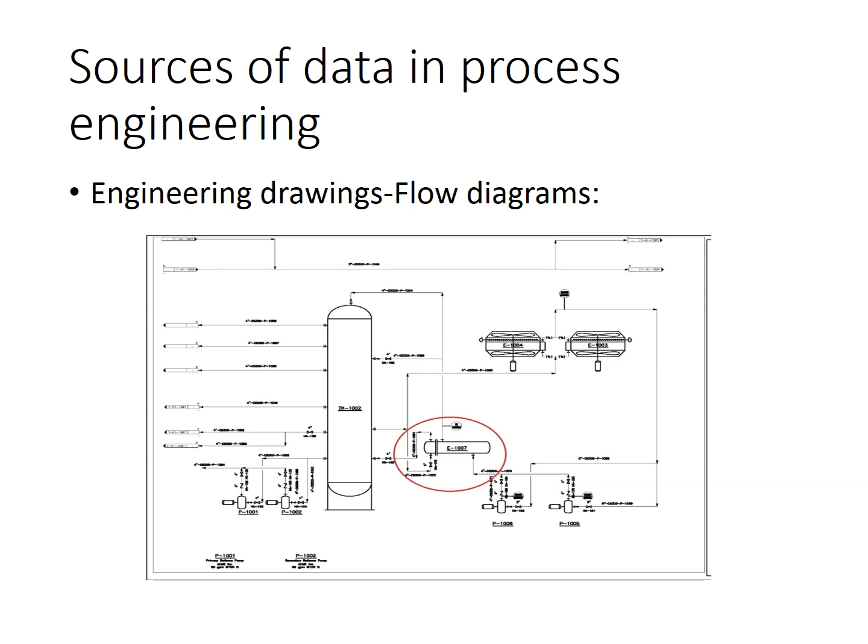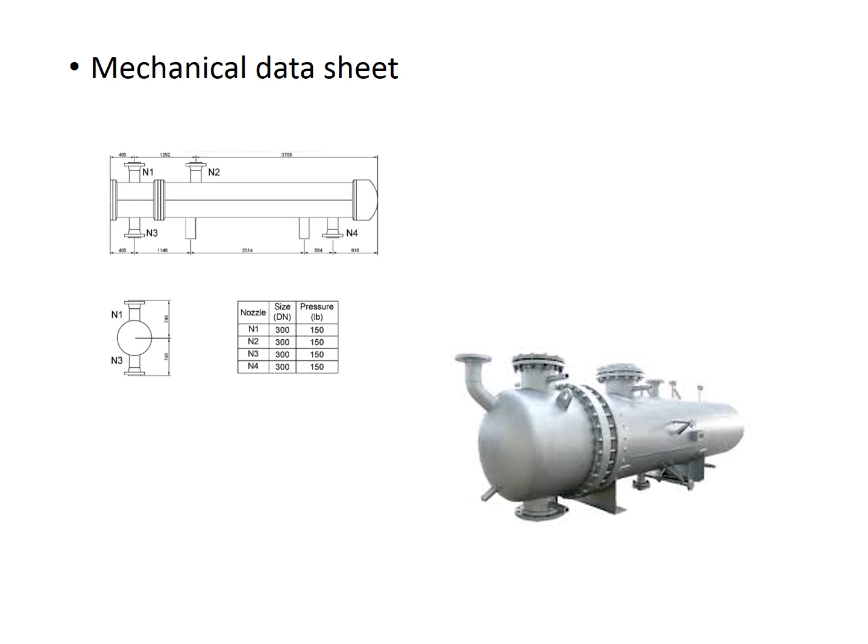The one I'm sharing here is another engineering drawing called Mechanical Data Sheet. It's full of data, but still only a human can read the data from this. And also we have engineering specifications and standards that we have to deal with. Again, they are human readable. It is not possible for a machine to understand, except if the machine can do NLP, or natural language processing.

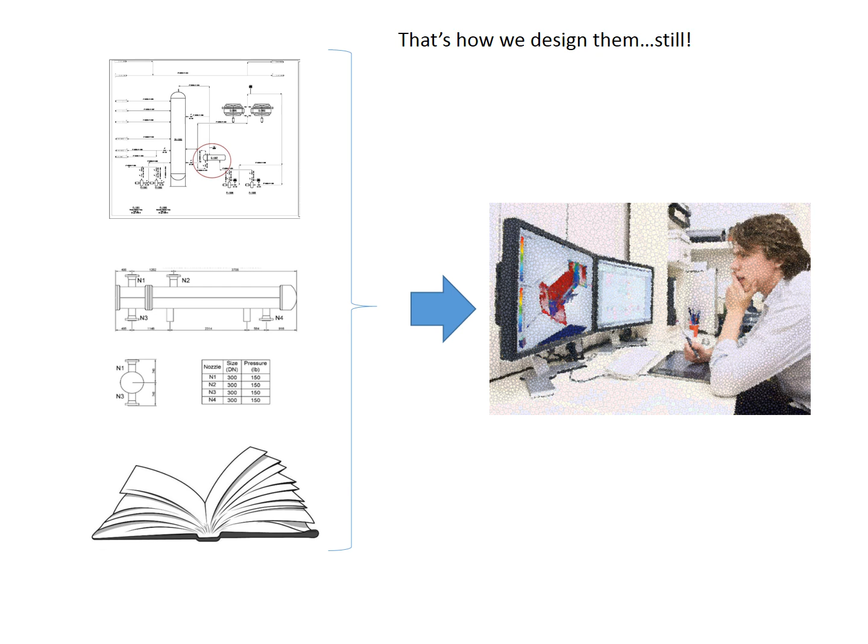So how do we design process plants, and how do we decide during operation or shutdown maintenance? What we do is gather all the data, as you can see on the left side. We gather all these engineering drawings, specifications, standards, and we send them to a designer, an engineer, a person in the operation field to design or make decisions. So that's a dream. That's what we think happens, and we want them to protect our planet Earth as well while they're operating.

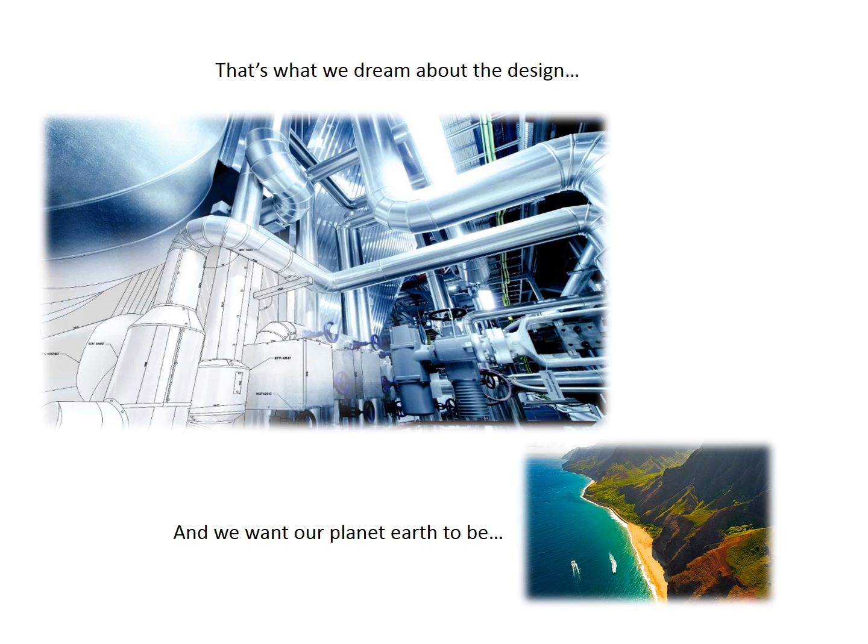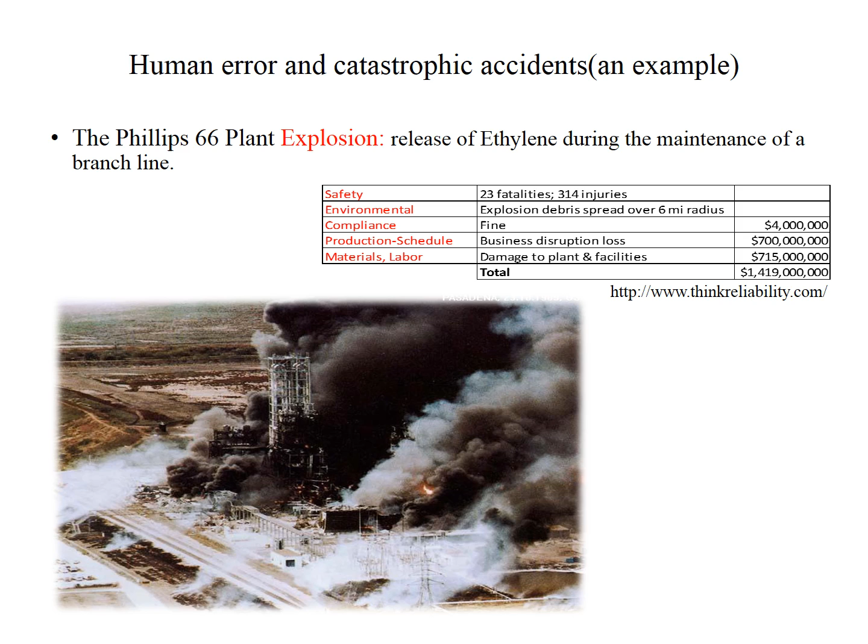But that's not the reality. The reality is there are so many incidents happening in chemical plants and oil and gas facilities, and that's, as you can see, what happens to human beings and to our nature. This is one example. It happened in Houston. 23 people died, and you can see on the table the amount of money spent for what happened.

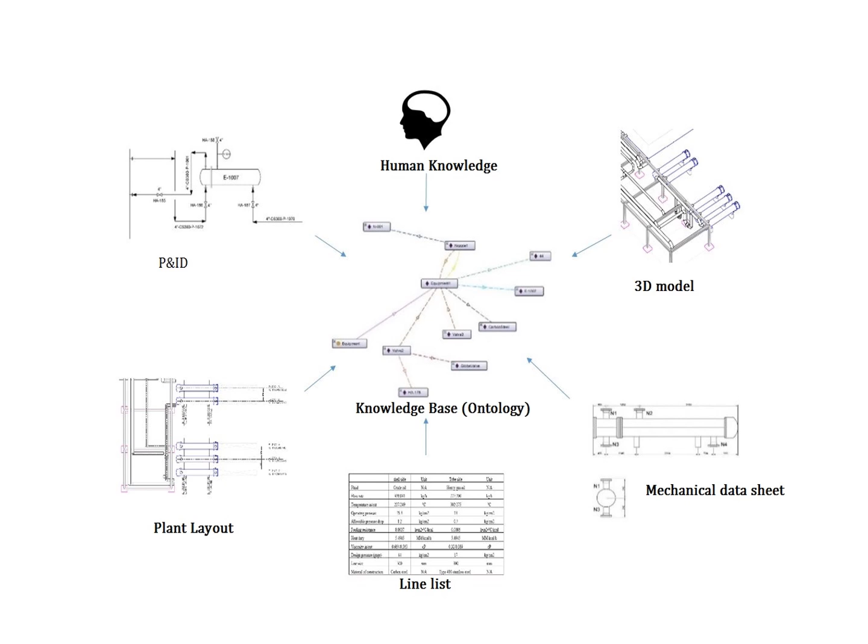So what I'm doing here is gathering all the data in something called a knowledge base. This knowledge base, in the AI and semantic technology field, is called an ontology. I'm gathering the 3D model, mechanical data sheet, line list, and also the human knowledge that is in the format of natural language into a knowledge base. This is one example of extracting and converting data from a P&ID to an Excel sheet or any tabular format.

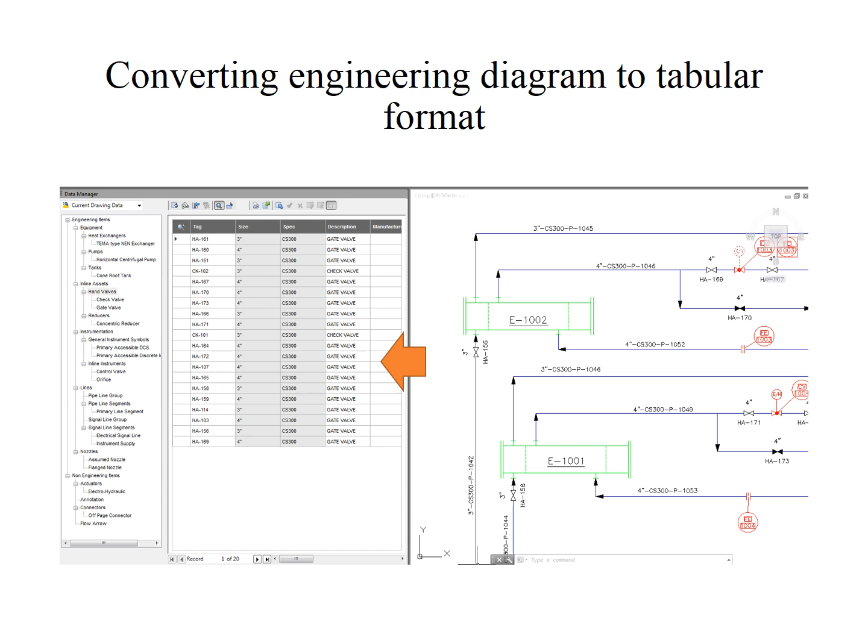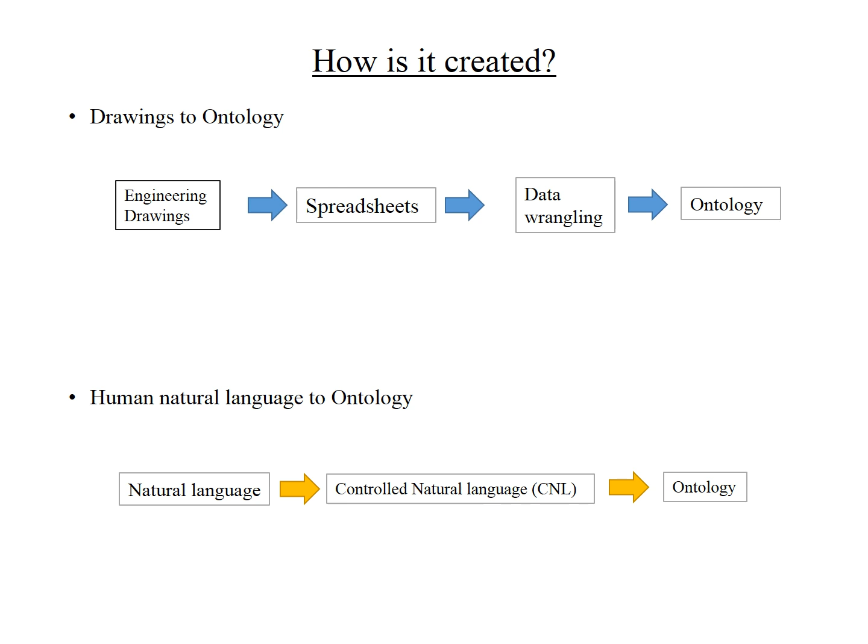From there, we're going to have spreadsheets, tabular format. We are going to have data wrangling because so many different terminologies are being used, and then we change that to an ontology. The other part is natural language. As I mentioned, we have specifications in human natural language. I use something called controlled natural language, and from there I can change that to ontology. Now, at this stage, we have everything from engineering drawings and natural language in one database called the knowledge base, which we call the ontology.

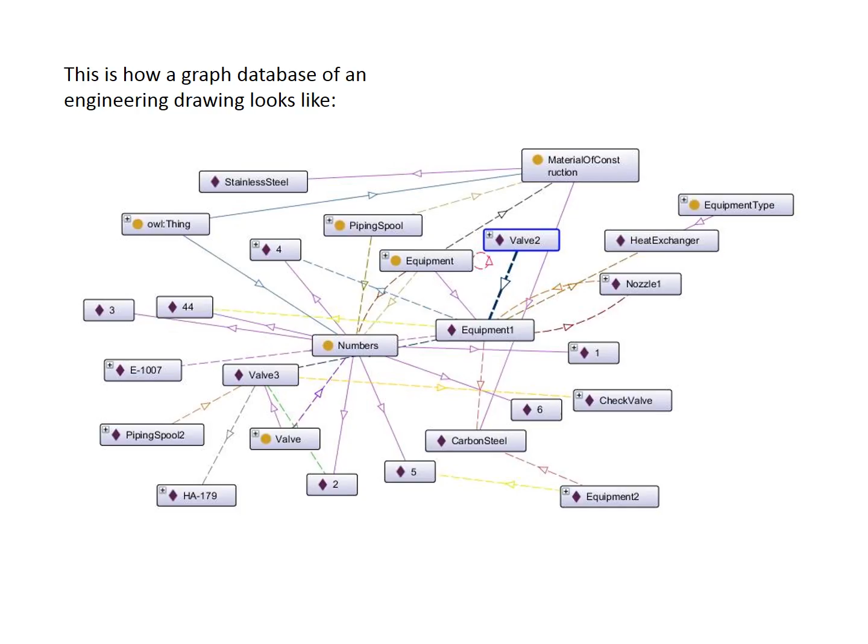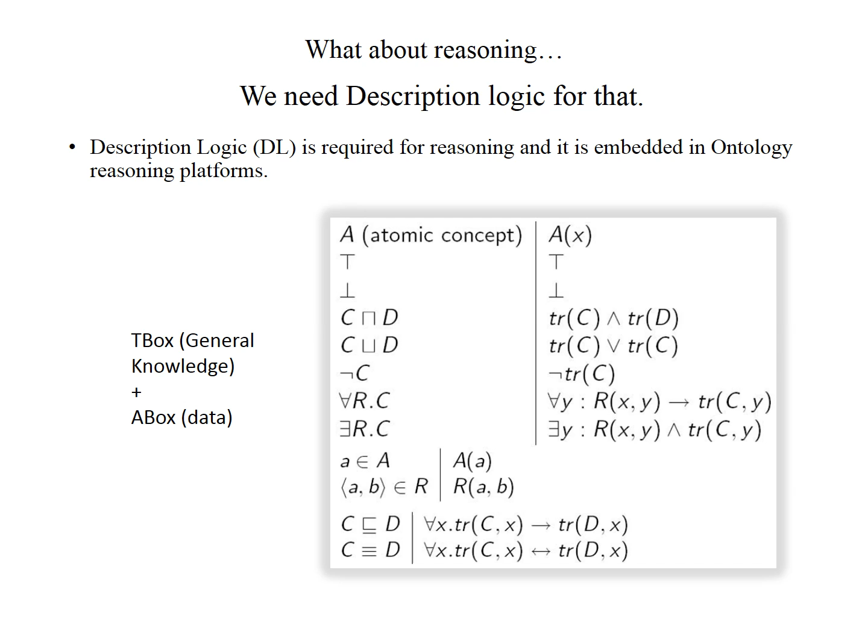This is one graph database that resulted, something you can actually see from the ontology. This is just a bonus. It's not what we are looking for, but a side effect of having an ontology. Having this, you can do a lot, but this is not the end result. What I'm looking for is reasoning from the data, from this knowledge base. As you know, for any reasoning we need logic, and I need something called a description logic for that.

I know it's probably becoming boring, but just bear with me for another 2 minutes.

Expressing our human natural language in description logic is not easy. It's not something we can do manually. I have shown here 2 examples of that. As you can see, manually changing the syntax, as we know it in description logic, is not possible.

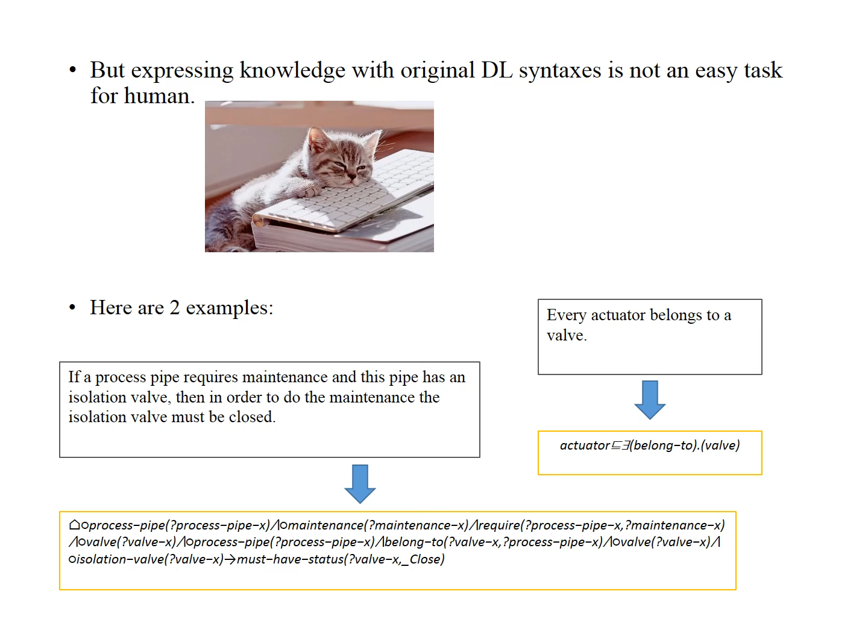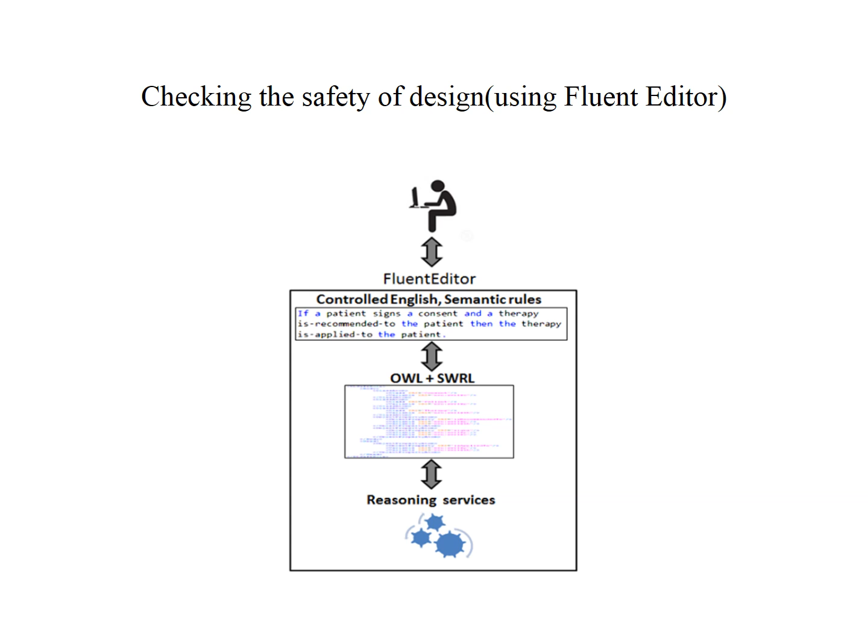Here, I'm showing you how we can change controlled natural language into description logic form. I have used a platform called Fluent Editor, and I can take the controlled English, or controlled natural language, have the semantic rules in there, and put it into description logic format using the syntaxes and having the right ontology. This is one example using another platform called Protege. Let me run this.

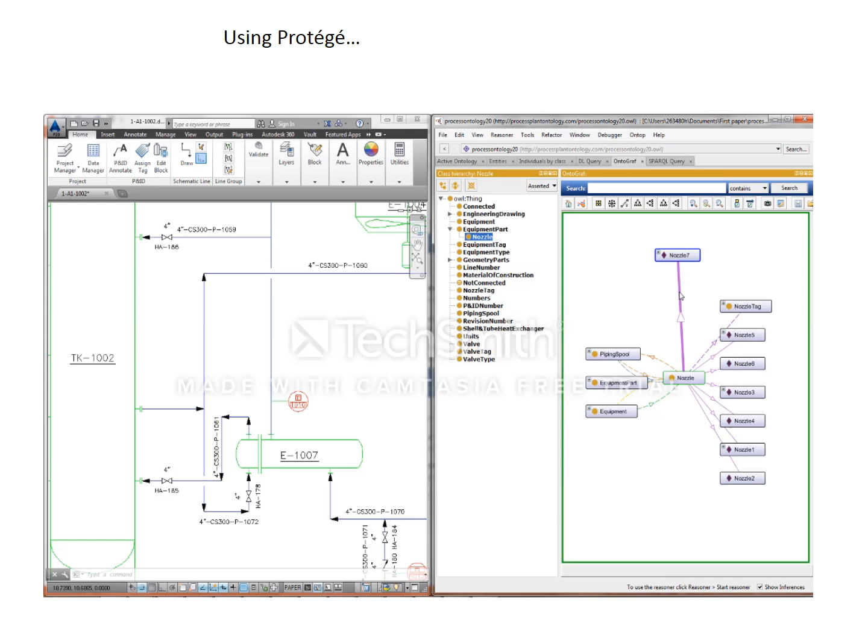So in this one, you can see that on the left side I have my engineering drawing, and I have created my knowledge base, and this is the graph database I talked about. As you can see, all the edges, all the relations have meanings. For example, I know an equipment like E1007 is connected to a line. So in our case, connection is actually defined, so the machine can understand the meaning of the relation between an equipment and a piping line.

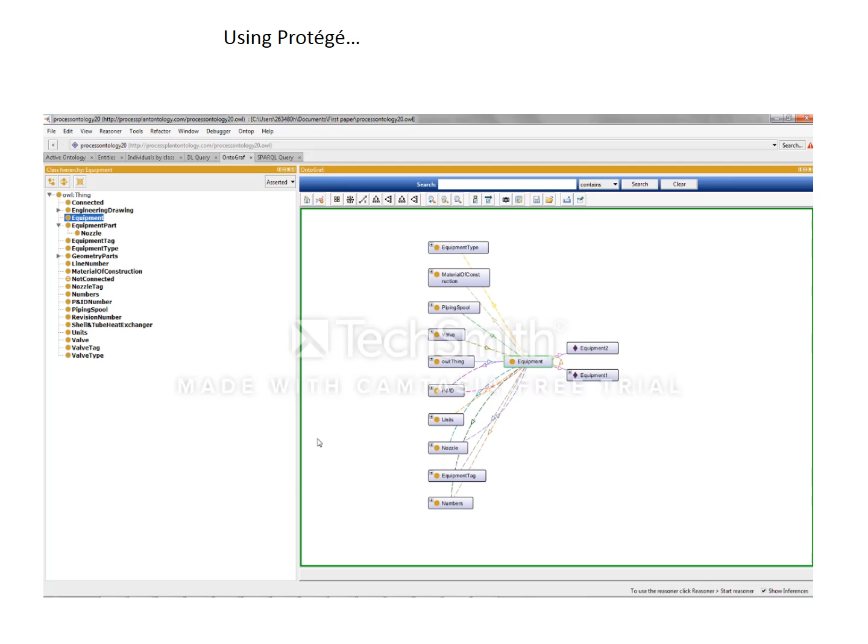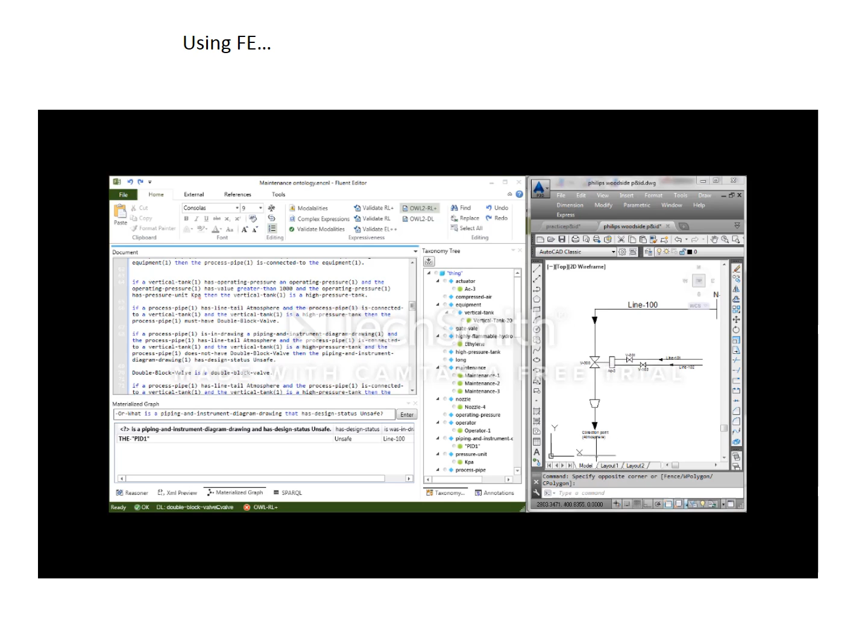What I'm showing here is using Fluent Editor. I have the same P&ID on the right side, and on the left side I have my ontology, but this ontology is using controlled natural language. So I have all the information about all parts of my engineering drawing defined in controlled natural language, and I was able to bring all my information, all the logic I require to make decisions, into Fluent Editor.

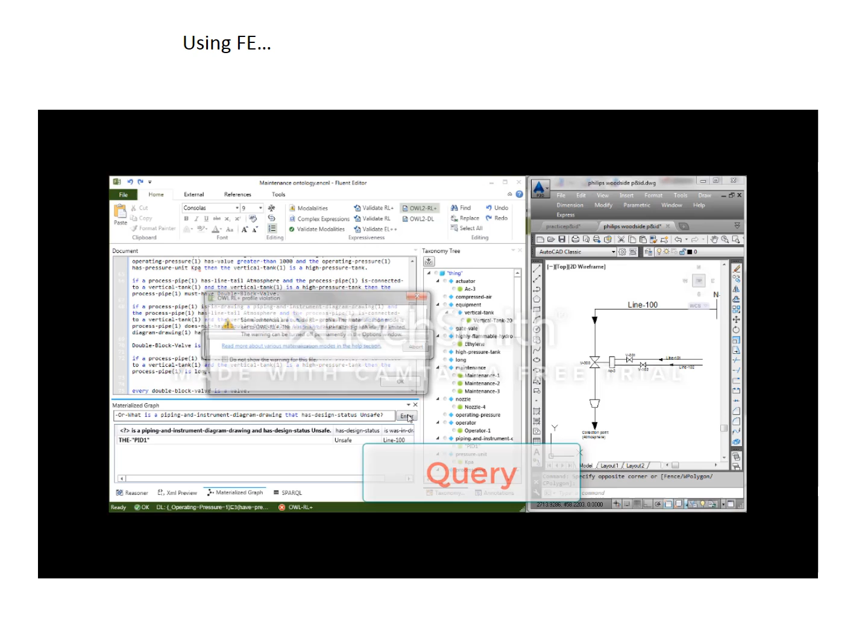And what we need from here is to make decisions. So I'm going to have the query, or the reasoner, as you can see here, to make decisions. For example, I'm asking, can you tell me if my plant is safe if I have this kind of diagram, and it's telling me that it's unsafe because of the information it has in the knowledge base.

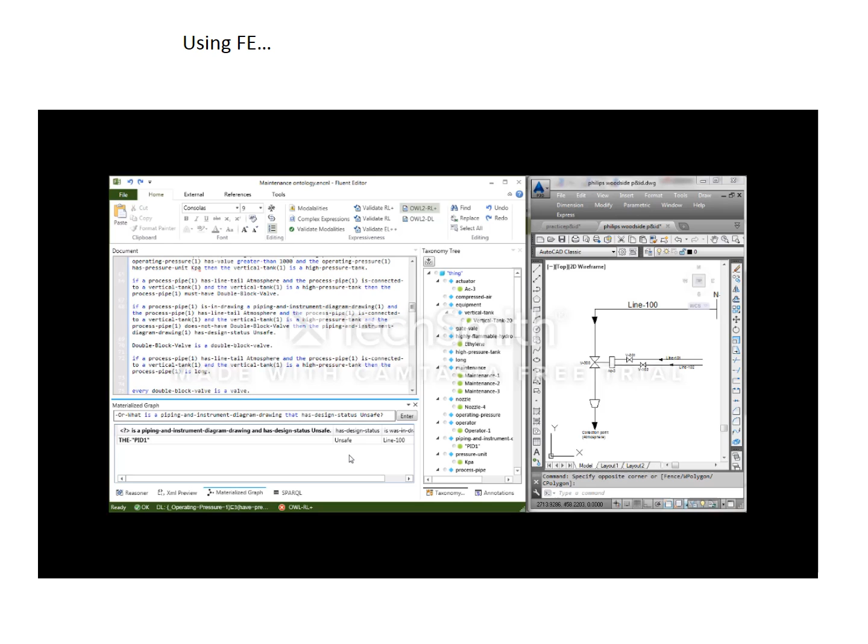This is just a brief description of part of my research and the way I'm using data science in it.